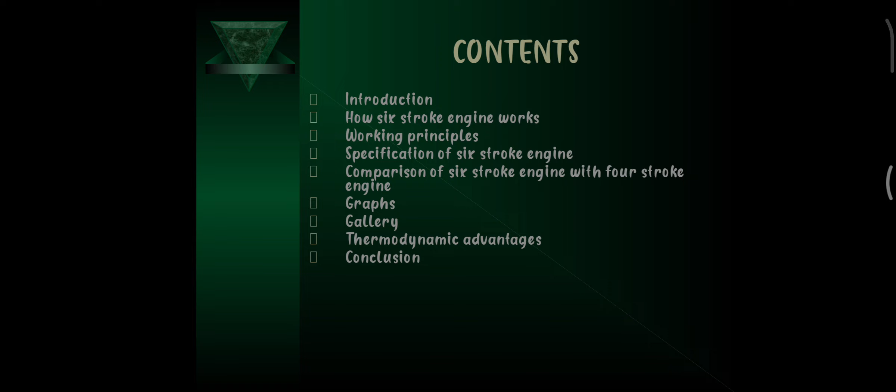Six-stroke engine. Contents: introduction, how the six-stroke engine works, working principle, specification of the six-stroke engine, comparison of the six-stroke engine with the four-stroke engine, graphs, gallery, thermodynamic advantages, conclusion. Introduction.

Malcolm Beare built an innovative hybrid design of the IC engine by combining a two-stroke engine with a four-stroke engine. The Beare head is a new type of four-stroke engine head design. The Beare head uses a piston and ports very much like a two-stroke engine to replace the overhead valve system that is found in four-stroke engines today. The four-stroke engine block, piston and crankshaft remain unaltered.

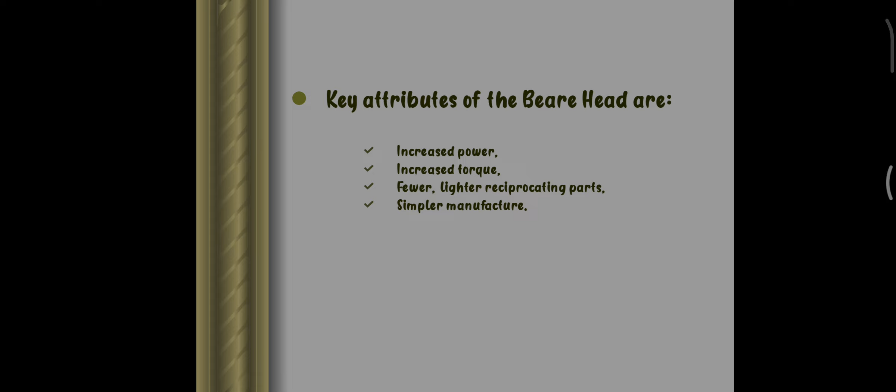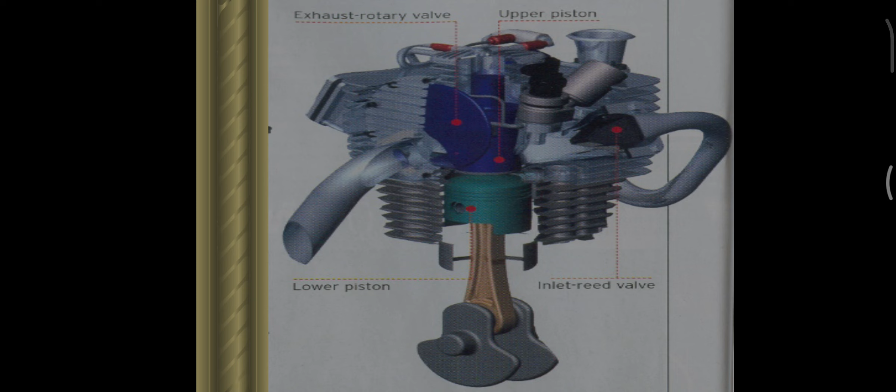This combination of two-stroke and four-stroke technology has given the engine its name, the six-stroke engine. 2 plus 4 equals 6. Key attributes of the Beare head are increased power, increased torque, fewer, lighter reciprocating parts, and a simpler manufacturing process. Exhaust, rotary valve, upper piston, lower piston, inlet reed valve.

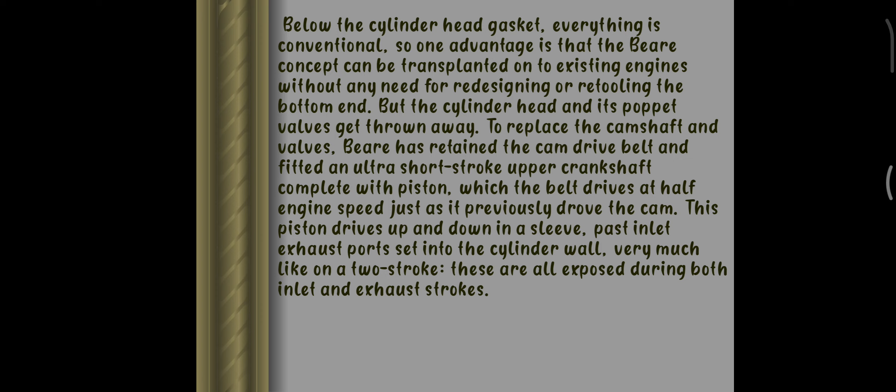How the six-stroke engine works. Below the cylinder head gasket, everything is conventional. So one advantage is that the Beare concept can be transplanted onto an existing engine without any need for redesigning or retooling the bottom end. But the cylinder head and its poppet valve get thrown away. To replace the camshaft and valve, Beare has retained the cam drive belt and fitted an ultra short stroke upper crankshaft complete with piston, which the belt drives at half engine speed, just as it previously drove the cam. This piston drives up and down in a sleeve past inlet and exhaust ports set into the cylinder, very much like a two-stroke engine. These are exposed during both the inlet and exhaust strokes.

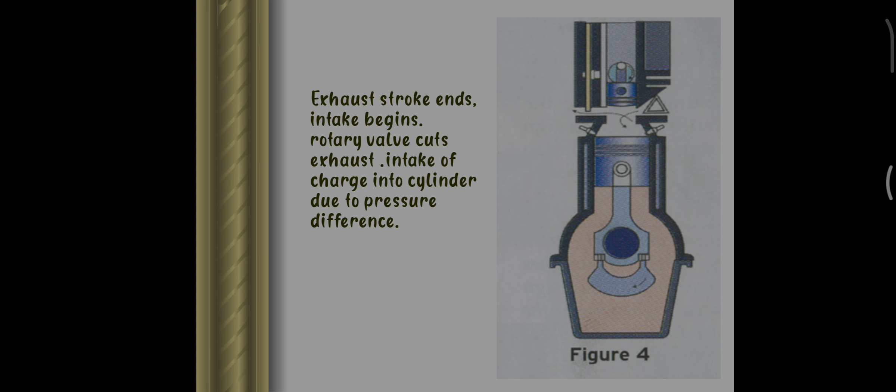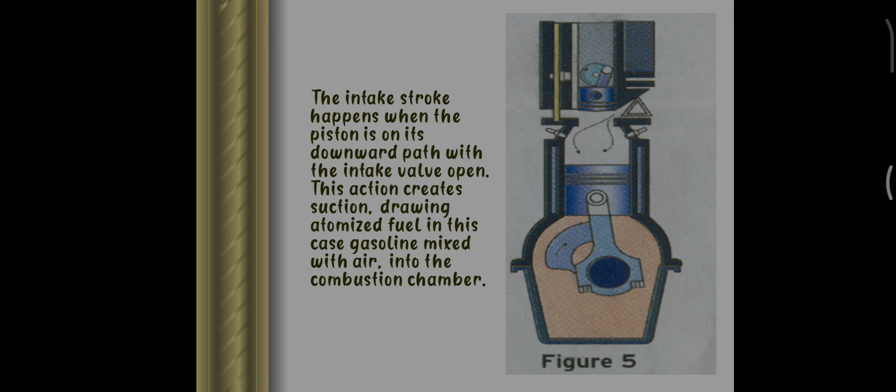Working principle of the six-stroke engine. Fuel ignites with the piston at top dead center. The rotary valve opens, allowing exhaust to escape. The exhaust stroke begins with the piston at bottom dead center. When the exhaust stroke ends, the rotary valve cuts off the exhaust, and intake of charge into the cylinder occurs due to the pressure difference. The intake stroke happens when the piston is on its downward path with the intake valve open. This action creates suction, drawing atomized fuel, in this case gasoline mixed with air, into the combustion chamber.

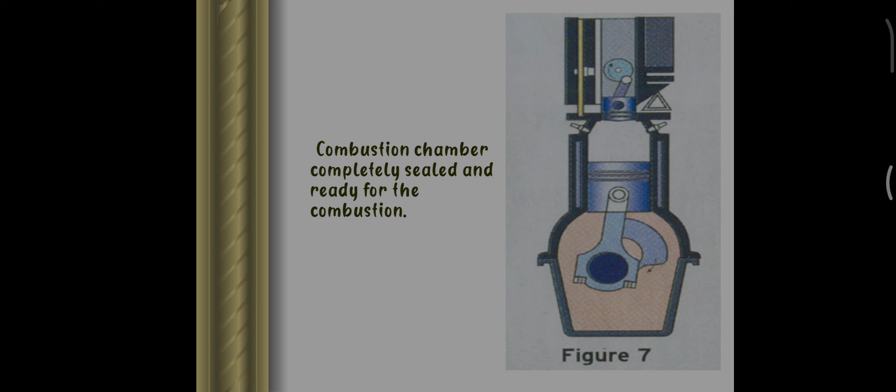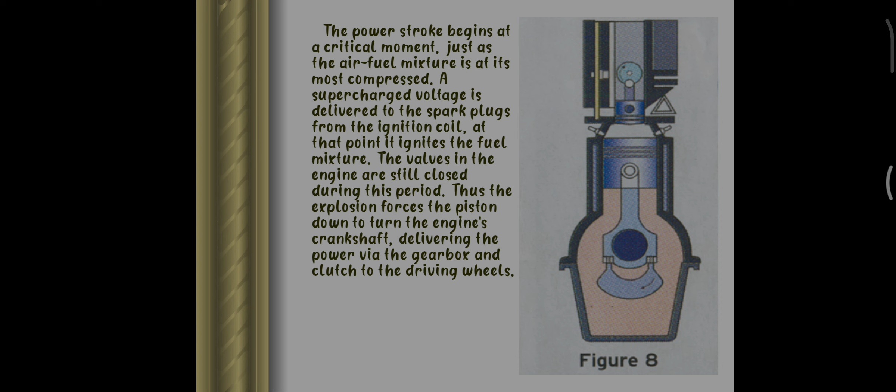The top piston nearly closes the inlet port completely, and the compression begins. The combustion chamber is completely sealed and ready for combustion. The power stroke begins at a critical moment, just as the air-fuel mixture is at its most compressed. A supercharged voltage is delivered to the spark plug from the ignition coil. At that point, it ignites the fuel mixture. The valves in the engine are still closed during this period. Thus, the explosive force drives the piston down to turn the engine crankshaft, delivering the power via the gearbox and clutch to the driving wheels.

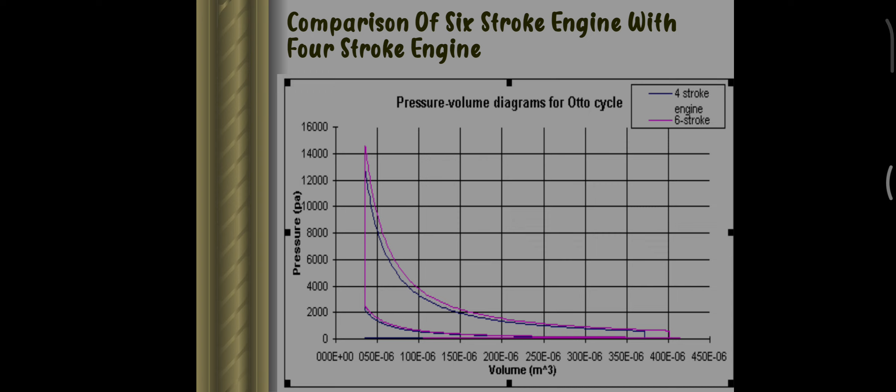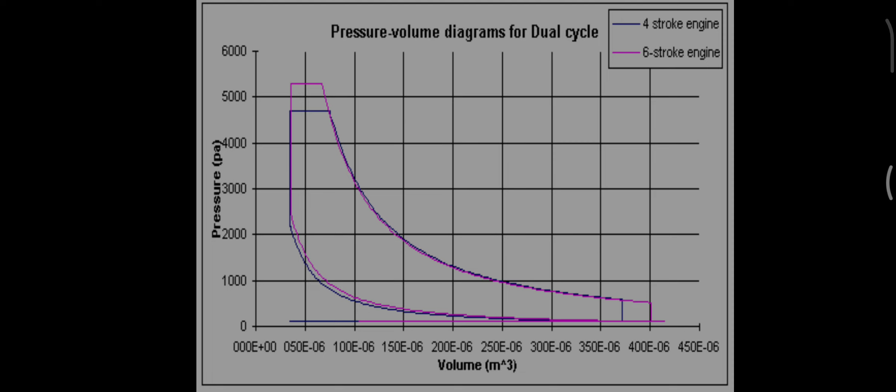Specification of the six-stroke engine. Comparison of the six-stroke engine with the four-stroke engine, with the help of a graph between pressure and volume. Here, the blue line represents the four-stroke engine and the pink line represents the six-stroke engine. Pressure volume diagram for dual cycle.

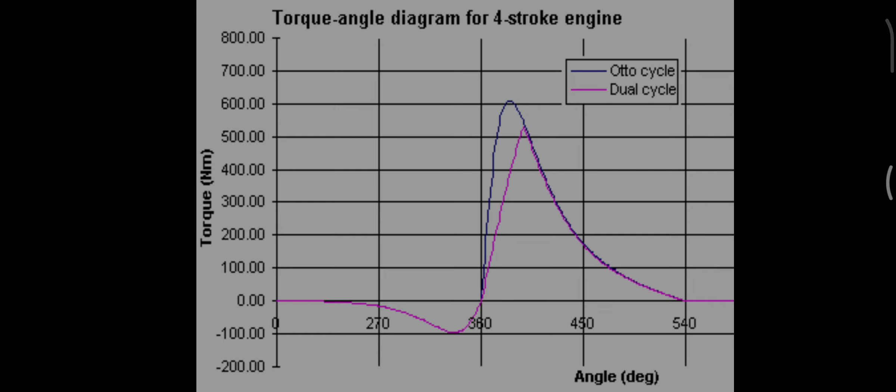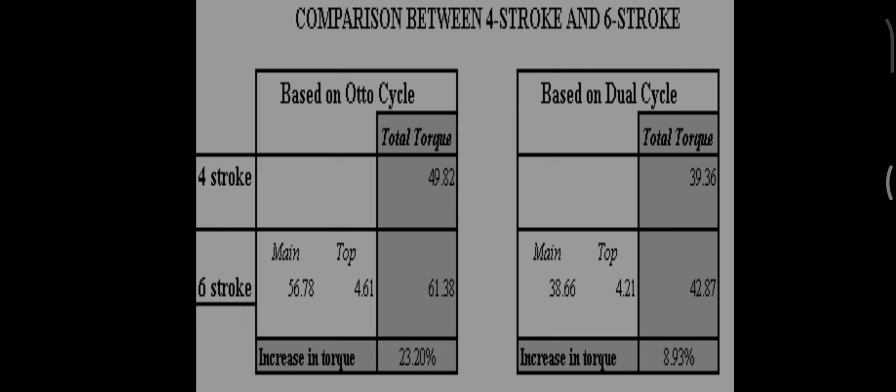Comparison between four-stroke and six-stroke engine based on the Otto cycle and based on the dual cycle. Four-stroke engine total torque 49.82. Six-stroke engine main 56.78 and top 4.61, and total torque here 61.38. Increase in torque is 23.20%. Based on the dual cycle, total torque 39.36, and total increase in torque is 8.93%.

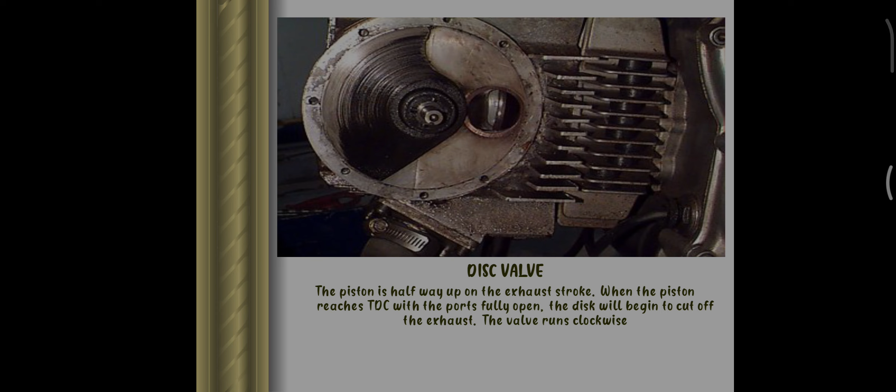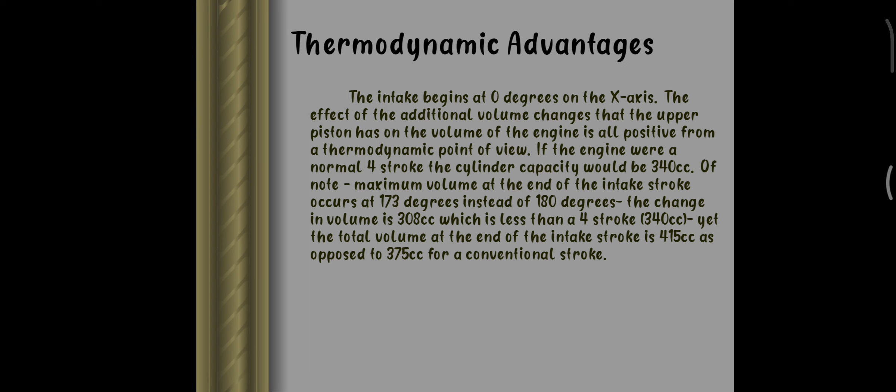Thermodynamic advantages. The intake begins at 0 degrees on the x-axis. The effect of the additional volume change that the upper piston has on the volume of the engine is all positive from a thermodynamic point of view. If the engine were a normal four-stroke, the cylinder capacity would be 340 cc. Maximum volume at the end of the intake stroke occurs at 173 degrees instead of 180 degrees. The change in volume is 308 cc, which is less than the four-stroke engine's 340 cc. Yet the total volume at the end of the intake stroke is 415 cc as opposed to 375 cc for the conventional four-stroke.

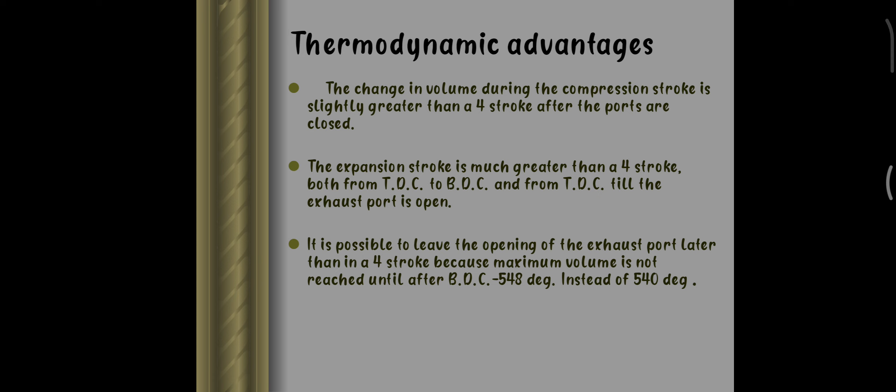The change in volume during the compression stroke is slightly greater than a four-stroke after the ports are closed. The expansion stroke is much greater than a four-stroke, both from top dead center to bottom dead center and from top dead center till the exhaust port opens. It is possible to leave the opening of the exhaust port later than in a four-stroke because maximum volume is not reached until after bottom dead center, that is 548 degrees instead of 540 degrees. Hence the six-stroke system is better from a thermodynamic point of view because more energy is extracted from the expansion process.

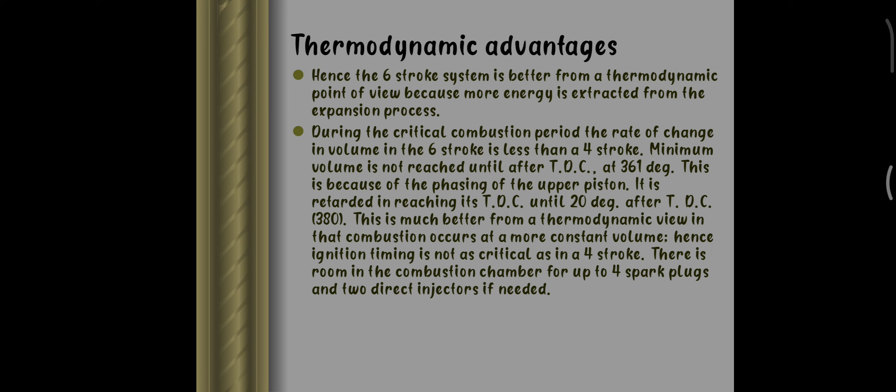During the critical combustion period, the rate of change in volume in the six-stroke engine is less than in the four-stroke. Minimum volume is not reached until after top dead center, at 361 degrees. This is because of the phasing of the upper piston. It is retarded in reaching its top dead center until 20 degrees after top dead center, at 380 degrees. This is much better from a thermodynamic view, as combustion occurs at a more constant volume. Hence ignition timing is not as critical as in a four-stroke, and there is room in the combustion chamber for up to 4 spark plugs and 2 direct injectors if needed.

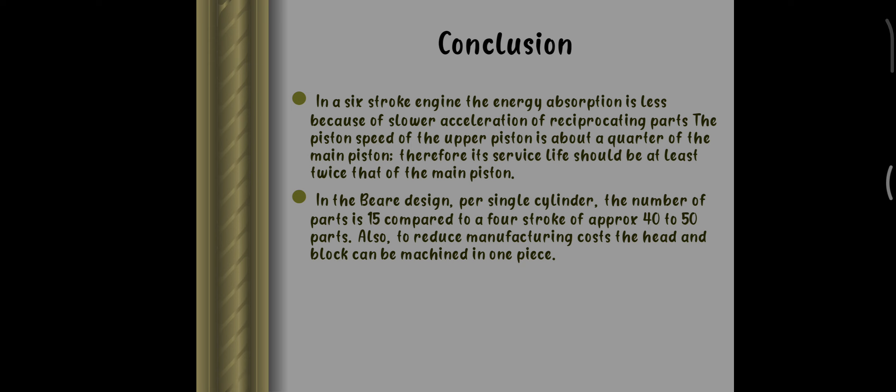Conclusion. In the six-stroke engine, the energy absorption is less because of slower acceleration of reciprocating parts. The piston speed of the upper piston is about a quarter of the main piston. Therefore, its service life should be at least twice that of the main piston. In the Beare design, per single cylinder, the number of parts is 15 compared to approximately 40 to 50 parts for a four-stroke. Also, to reduce manufacturing cost, the head and block can be machined in one piece. The bottom piston is a standard design and the Beare head bolts directly onto the engine block, replacing the overhead valve and standard head.

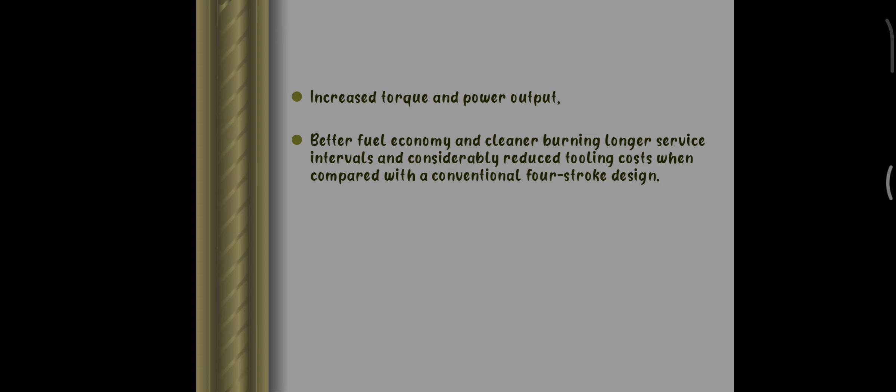It reduces the weight and complexity of the engine head by as much as 50%. Instead of using energy to drive the head, the head actually develops energy for conversion to power back through the timing chain of the engine. Torque is increased by 35% and efficiency is increased by the same 35%. This can be achieved simply by unbolting an existing head of a four-stroke engine and bolting on a Beare head. Increased torque and power output, better fuel economy and cleaner burning, longer service interval, and considerably reduced tooling cost when compared with a conventional four-stroke engine.